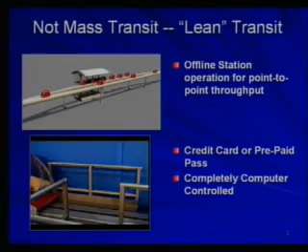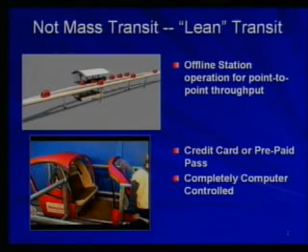PRT vehicles require no drivers and can operate 24/7. Electrically powered, they're emission-free and nearly silent. Solar panels can also be placed along the PRT trackway. As an elevated system, certain opportunities especially fit the Great Park application. The vehicles and trackway do not compete with anything on the ground, and they offer a unique perspective of the park from the glass-enclosed, air-conditioned pod at about 15 feet in the air.

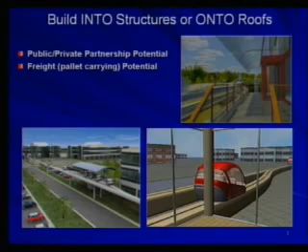In retail and office situations like the Spectrum and in vertical housing development planned around the ITC, PRT is readily built into the second stories of structures, enabling station portals right at the buildings. It can even be built on shopping center roofs. We've already suggested this to the Irvine Company and South Coast Plaza.

PRT is not mass transit, rather it's lean transit. It's not designed to move crowds with its small vehicles. Rather, it's designed to cause crowds not to form. PRT vehicles wait for their riders and not vice versa. One of the keys to the design of the system is the offline station. Vehicles on the trackway do not stop at stations for which they're not destined.

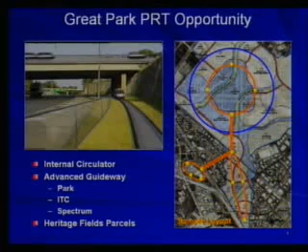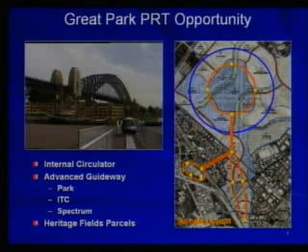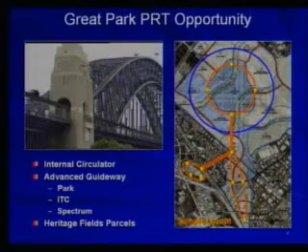PRT is perfectly suited as a solution for Irvine's Advanced Guideway project. As a very cost-efficient system, PRT can make the best use of your Prop 116 funding, servicing both the park and the Spectrum and readily integrating with other transit at the ITC. As well, we see PRT as a future candidate for transit in the Irvine Business Center, especially with the vertical development being planned in that area. As well, it can be a connector to the airport. PRT could also serve the Heritage Fields developments surrounding the park.

We do not today represent a particular PRT vendor. You'll appreciate that this is emerging technology, and you'll wish to keep your options open until it's clear who will best be able to deliver in the aggressive timeframes you're calling for. We understand that you'd like to see a working system by 2010. Two vendors appear to be able to meet this requirement.

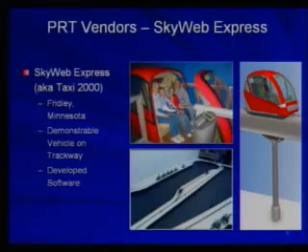While the motor technology in the vehicles and the trackway itself can be built today from off-the-shelf components, it's the wireless control system securely communicating with onboard computers in the vehicles that's critical to the safe operation of the system. Software will control everything: headway, routing, television security at the stations, fare handling, and much more.

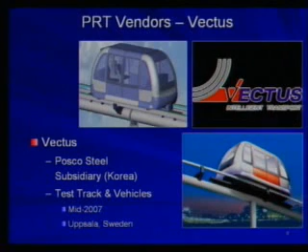Another possible vendor is a subsidiary of POSCO Steel out of Korea. Vectus Intelligent Transport is constructing a test track in Uppsala, Sweden and promises to have it finished with 3 vehicles running next summer. They are reasonably optimistic of meeting your delivery needs. As a startup, their technology looks promising, and it's important that they have the backing of a strong and well-funded parent.

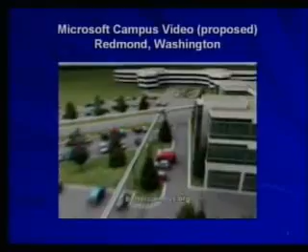With the PRT development that's ongoing around the world, the best comparison we've found to your advanced guideway application is this video of a PRT system proposed for the Microsoft campus in Redmond, Washington. I'm going to let this run, and I'd like to take any questions you might have.